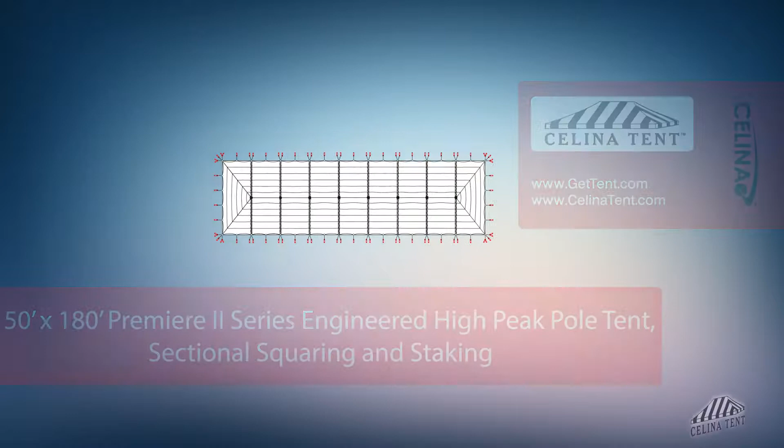This video covers squaring and 5-foot staking applicable to a sectional 50-foot by 180-foot Premiere II Series high-peak pole tent from Celina Tent. 5-foot staking is standard for tents with an eave height of 7 or 8 feet and would need to be adjusted for eave heights other than this standard.

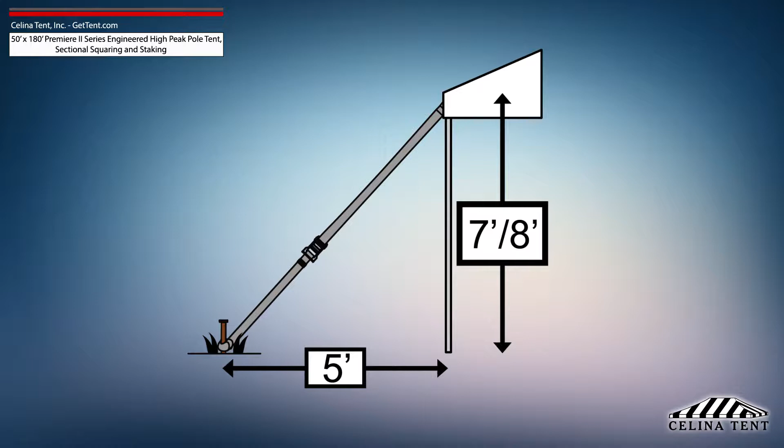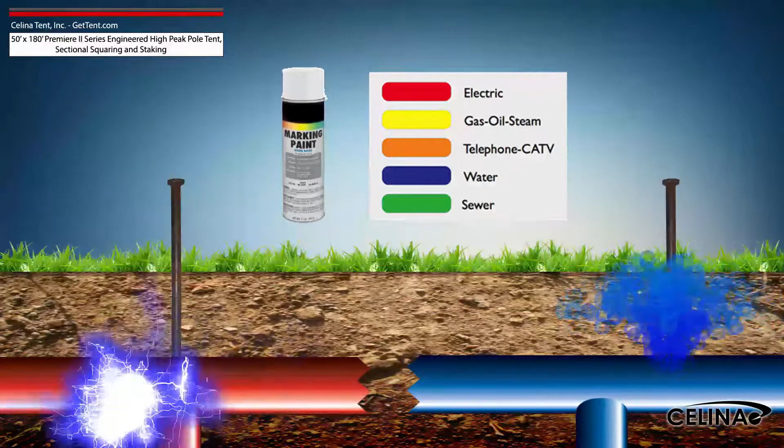Tent squaring allows the installer to accurately place all tent hardware and install tent stakes prior to beginning setup, and helps them avoid any marked underground utilities. Utilities must be marked by your state's local utility services prior to any tent installation.

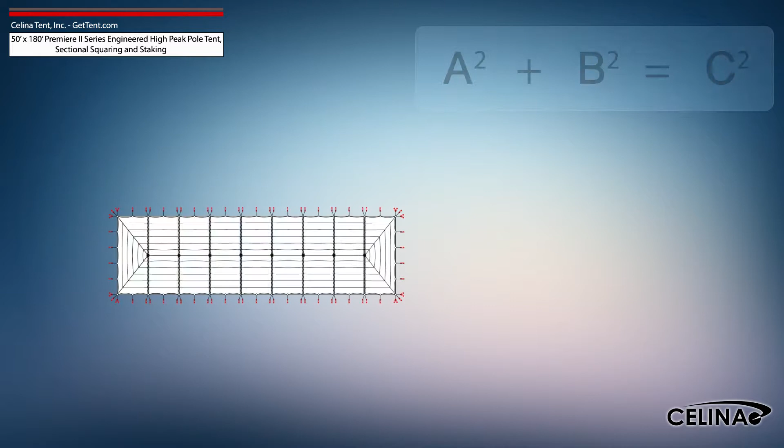Using the Pythagorean theorem and adjusting out for 5-foot staking, the entire tent footprint will be 60 foot by 190 foot, with a 199 foot 3-inch diagonal length.

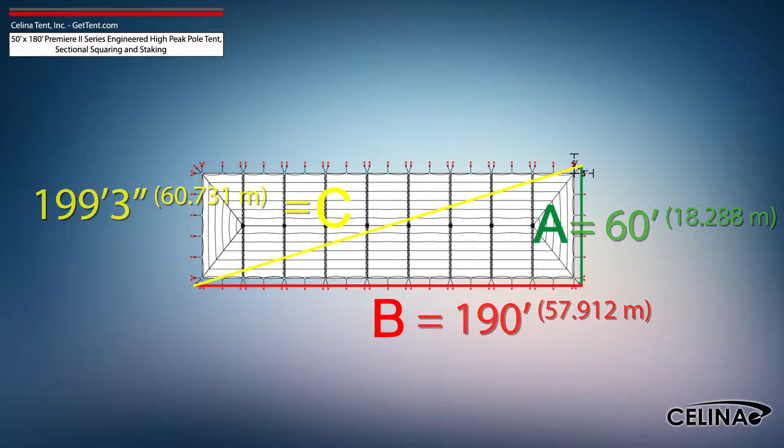Celina recommends that a 50-foot by 180-foot Premiere II Series high-peak pole tent receives a minimum of 156 stakes. 8 stakes and 5 stake plates for each corner pole. 2 stakes and 1 stake plate for each side pole. 4 stakes and 2 stake plates for each side pole at lace line locations. And 1 stake for each center pole.

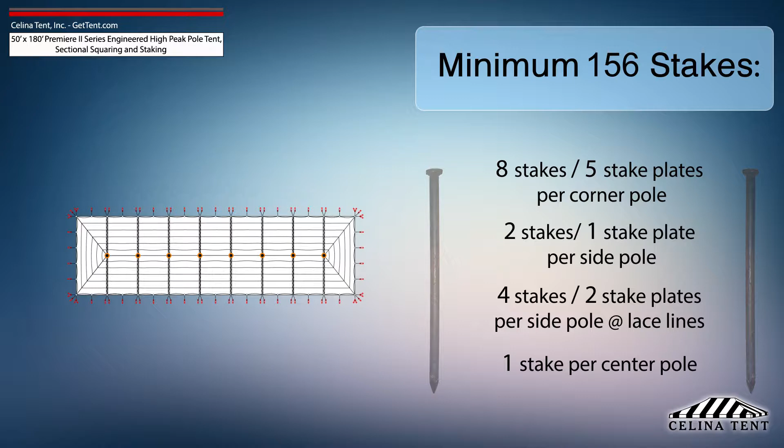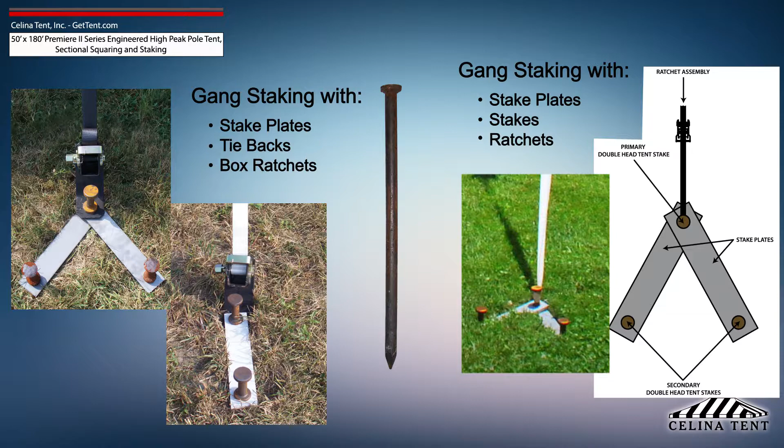This amount of stakes provides the minimum amount of security for a pole tent of this size. Additional staking is required for any site that doesn't meet optimal soil conditions. Tent staking is the most important safety procedure during tent installation. Tent stakes should be driven vertically so that the stake is as close to the ground as possible with space to tie on a strap.

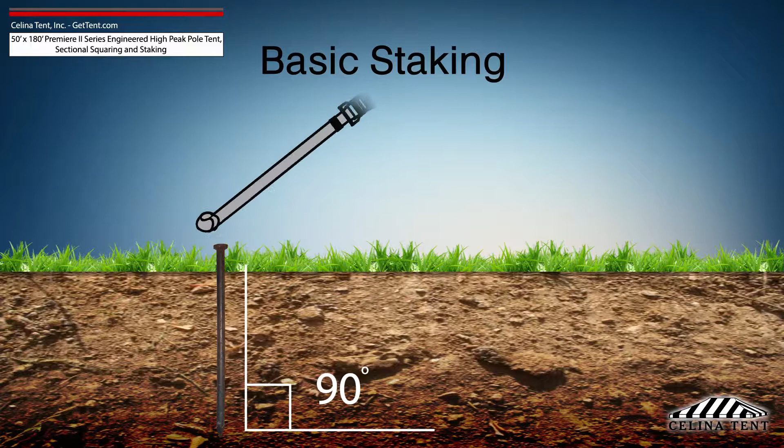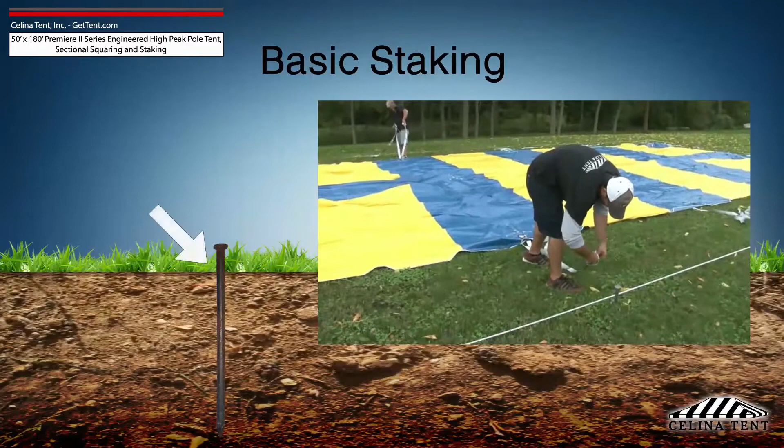Any length of stake protruding from the ground that is more than 6 inches will have detrimental effects on the holding power of the stake. Attach the ratchet strap or rope as close to the ground as possible to reduce strain on the stake. It is the installer's duty to inspect the soil conditions and possible weather effects for the duration of the tent installation. For water-saturated or loose soil, more tent stakes are required to achieve adequate anchoring.

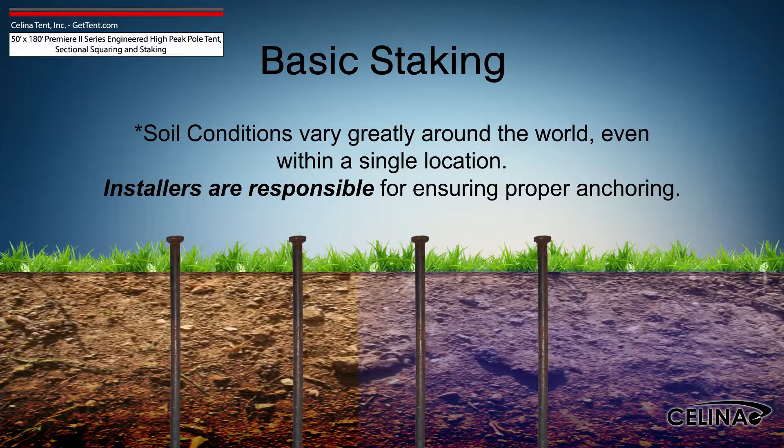Staking may be increased using dual stakes and a staking plate, or gang staking utilizing 2 staking plates and 3 stakes.